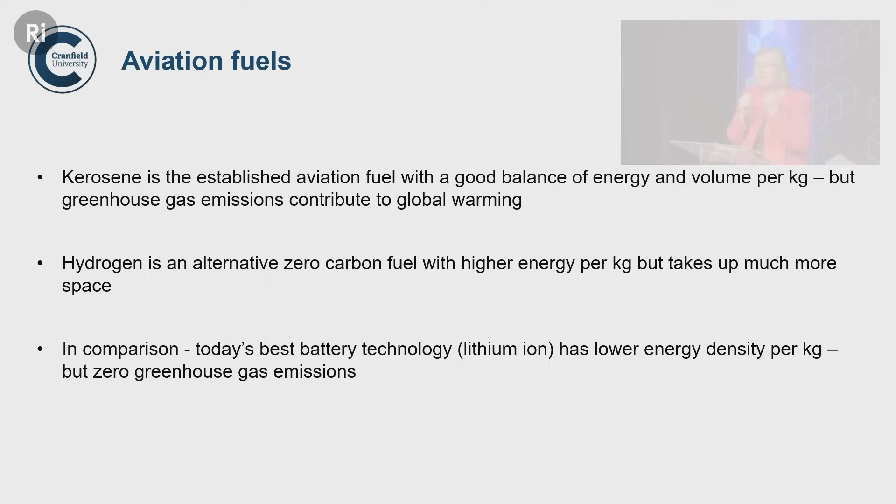So, as we look at the challenges around electric flight, we need to just ground ourselves for a moment. So, aviation fuels. Most flight nowadays is based on kerosene. Sometimes people call it aviation fuel, just as a general term. But kerosene is quite a good compromise between the energy density and how much space it takes up. So to get our aircraft into the air, we're going to need a certain amount of power to overcome the weight. Within our fuel, we've got to get that power density, that energy density that we actually need. But when we look at some of the competing ways of powering flight, there are some very big challenges.

So some of our speakers tonight may actually refer to hydrogen. Now, hydrogen is an alternative way of getting to zero carbon fuel, and it's got great energy density per kilogram, but it takes up a lot of space. So when people are looking at aircraft to get across the Atlantic, and I'm sure Jacqueline, who's one of our speakers, is going to talk about this, it's actually really difficult to have an airliner that can get enough gaseous hydrogen on board to get across the Atlantic.

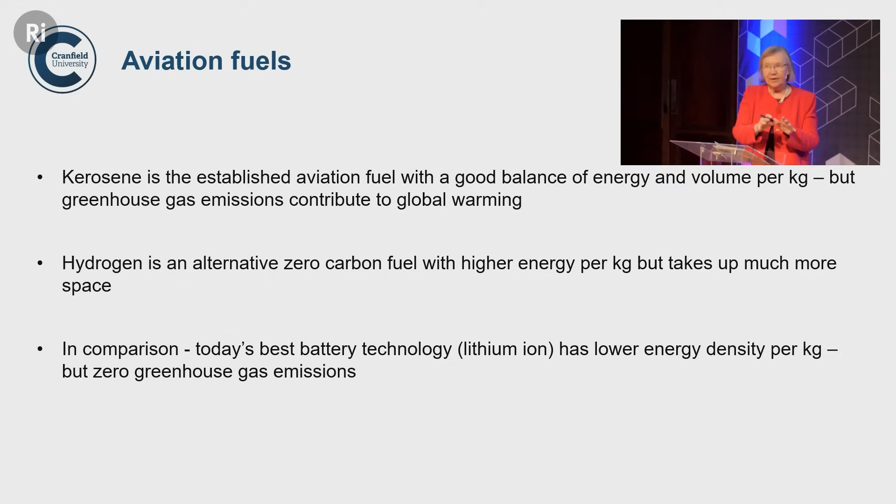Then let's look at what happens with batteries. So a lot of tonight is about batteries, getting electric flight. And we need our battery's energy density to be really high and for the battery not to weigh so much. And that's a big challenge, because you'll know for electric cars, one of the big challenges is the weight of the battery. So many of the researchers in this room tonight are real experts on trying to drive forwards how we get batteries of sufficient energy density but also at minimal weight to actually get on board. So just a few examples before we move through to the speakers.

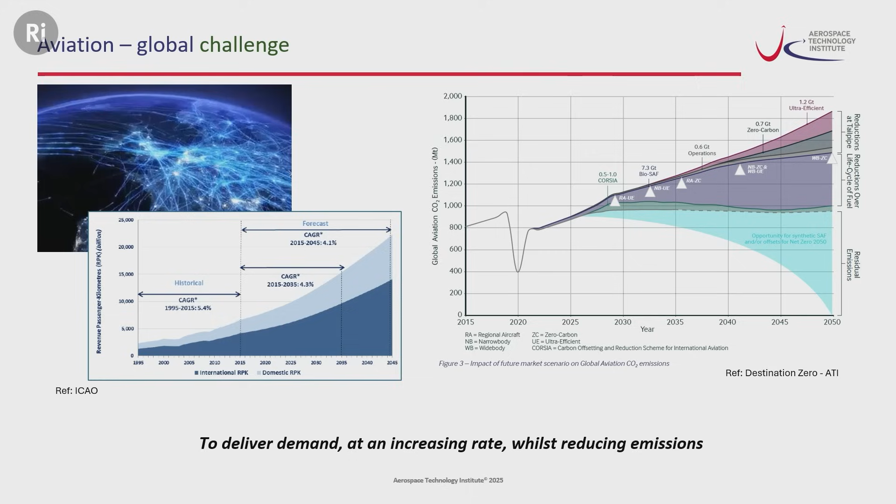But even with all of these items, there's more to do, and future technology has a really big part to play. Striving to make the next generation aircraft as efficient as possible to directly reduce the fuel that's used, and thus the emissions generated, is really key. So developing aircraft to use revolutionary fuels as well, like liquid hydrogen, as was mentioned, can also help us deliver zero carbon emissions. So there's plenty for us to go at.

Let me introduce the ATI for those of you that are aware. So we're a private, not-for-profit company, and we're working independently to advise UK government on aerospace technology development needs. We manage 3 ATI funding programmes, and to date, the ATI has directed 3.6 billion of funding from UK government, matched by industry, with a future commitment of 195 million per year out to 2030.

The ATI team provide expert analysis, models and tools to inform how technologies may integrate together and the sustainability benefit that they will then deliver. And the tools are available through the ATI website if you want to take a look at those. And they assist stakeholders in their technology benefit assessments. Our own independent modelling includes economic, market, sustainability, and aircraft-level technology modelling.

And we reflect the ATI's project portfolio onto our concept future aircraft models that can then be used to trade technology routes and give a basis for sector discussion and thought leadership. We also convene the sector through technology advisory groups, communities of practice, showcases and events, including our annual conference.

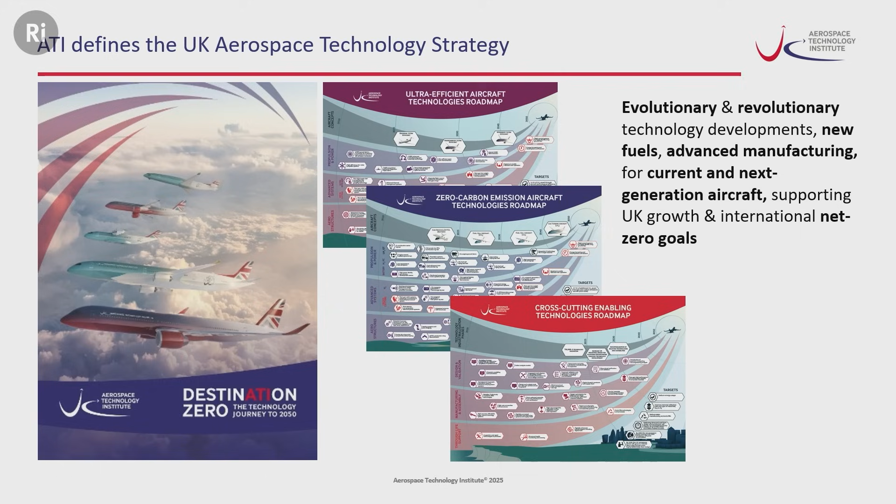So the applications for funding are made on a rolling basis, and we have 3 full-stage application gates per year. And the technology is assessed against the ATI's technology strategy that you can see on the screen here. And this guides the UK sector to the areas that are necessary to grow the UK's market share and move the dial in sustainable flight. So the technology strategy, Destination Zero, contains 3 roadmaps. It has an ultra-efficient technologies roadmap, a zero-carbon roadmap, and also a cross-cutting technology roadmap. And all these 3 areas play a part in growth and net zero.

So we need the most efficient vehicles in terms of aerodynamic performance, in terms of propulsive performance, and lightweight airframes and systems to minimise the fuel that's needed, whatever fuel that might be. And we need a revolution in technology to achieve true zero carbon flight. And we must deliver all of this in an operationally and cost competitive way. So the ambitious production rates of the future require highly automated, digitally enabled, high quality industrial processes, and products will use these advanced novel materials and processing techniques in order to achieve the efficiencies required. So the roadmaps capture all of this ambition.

So we're here tonight to focus on the use of batteries in aircraft and what more we need to do to bring battery flight to the skies. And today, batteries are used in two main ways. Firstly, to power some systems on large commercial aircraft, excluding propulsion itself. And then secondly, to provide propulsive power for very small aircraft, of which there are very few certified platforms. And Helen mentioned one of them, the Pipistrel Velis Electro. So as was said, the first certified electric-powered aircraft, fully approved and mainly used for pilot training.

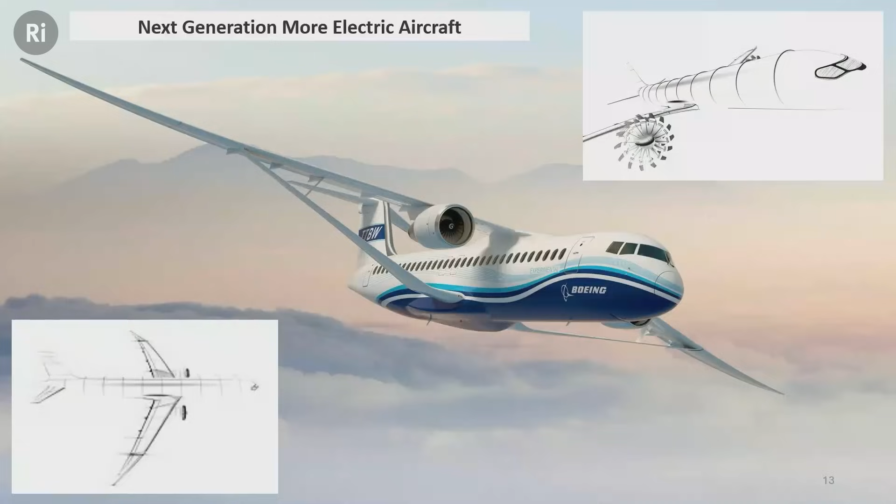So what will happen really for next generation large aircraft? The next generation aircraft are aiming for at least 30% fuel efficiency improvements, most of which will come from the airframe and from the engines. So further improving the aerodynamics with longer, leaner, lighter weight wings, like you see in some of the pictures here, and also the inclusion of higher bypass ratio engines, such as Rolls-Royce's development engine UltraFan, which is targeting a 10% improvement on previous generation engines, or CFM's concept engine RISE, with the open fan architecture, which is shown in the Airbus schematics on the slide.

However, these future aircraft will also push for advances in electrification on board and require greater battery power for these increased functions. So primary battery use, in addition to APU or ground ops, is likely to include electric taxi functions. And this would enable the aircraft to taxi from the stand at the airport out to the runway without the engines running, as well as when the aircraft lands to be able to taxi back into the airport spaces. So this would be beneficial for both sustainability and local air quality reasons. And potential hybrid propulsion applications may also require batteries, but I'll cover more of that in a moment.

So other backup functions during flight, in addition to primary flight controls, would include avionics, lighting and fuel pumps that are already on the aircraft, and could include secondary flight controls, such as the braking system, the environmental control system, cabin systems, and perhaps other landing gear functions. So even a small number of these additional functions will lead to a substantial increase in demand for aerospace-grade batteries, which is orders of magnitude higher than today.

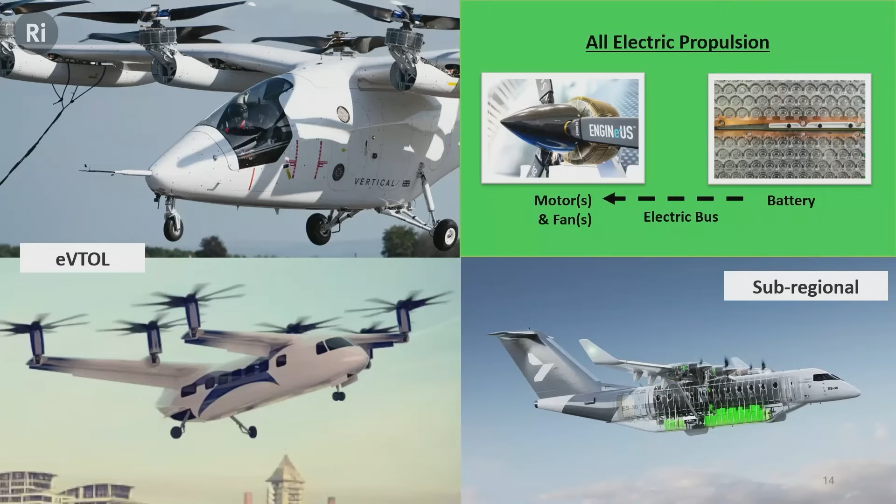If we turn now to pure battery electric propulsion, as shown in the diagram here, the batteries are powering electric motors that are then driving one or more fans to propel the aircraft. So it's probably as simple as you can get. In the UK, there are exciting developments in electric powertrains, and Safran has recently certified their ENGINeUS motor technology in a world-first EASA CS23 certification. This technology was developed with support from the ATI APEC project, and we can look forward to production at their UK Pitstone site with applications for motors initially on small aircraft, similar to the Pipistrel, as well as for eVTOLs. But pure electric propulsion developments today are mostly aimed at the eVTOL market.

And whilst the flow of energy from the battery to the motor and to the fan might be pretty straightforward in principle on a piece of paper, there are many challenges to overcome. But here in the UK, we have a number of organisations working in this area, with Vertical Aerospace being the most advanced. And you'll hear more from them next, and how they're developing their battery packs for their full-size VX4 prototype, as you see at the top left in the picture. That's during initial piloted tethered testing, but I know they've made much more inroads now in their flight testing, so I'm hoping we'll hear more about that in a moment. But one of the main challenges with pure battery-powered vehicles is managing the weight of the batteries as a percentage of the overall vehicle weight, and being able to then deliver sufficient useful range.

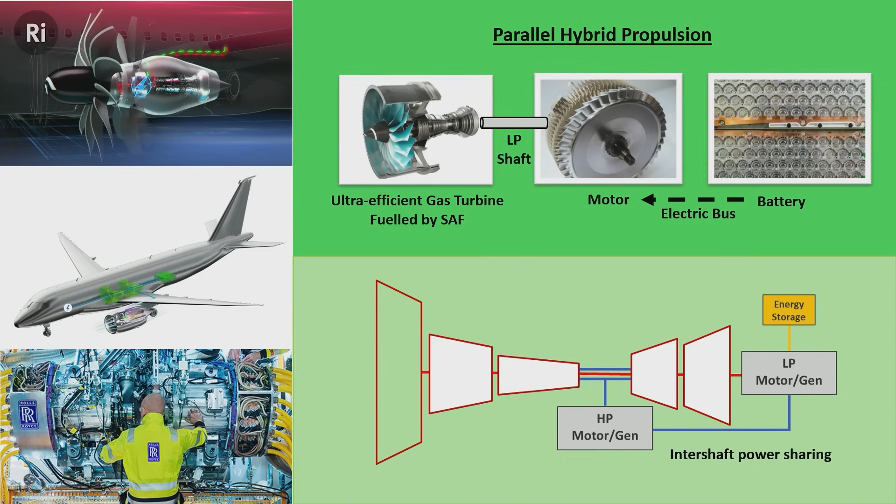So the system would need to address other aerospace-specific requirements like higher altitude operations, but there is great progress being made and many studies actively, globally, that are looking at these options. As you can see on the left-hand side here, the RISE engine, the SWITCH project that Clean Aviation are funding, projects with NASA's electrified powertrain flight demonstration, and closer to home, Rolls-Royce have run ground-based testing as well.

So I hope this has shown that there are multiple strands to the rise of electric flight. There's a rich and dynamic research environment all working to overcome the many challenges to deliver an electric revolution.

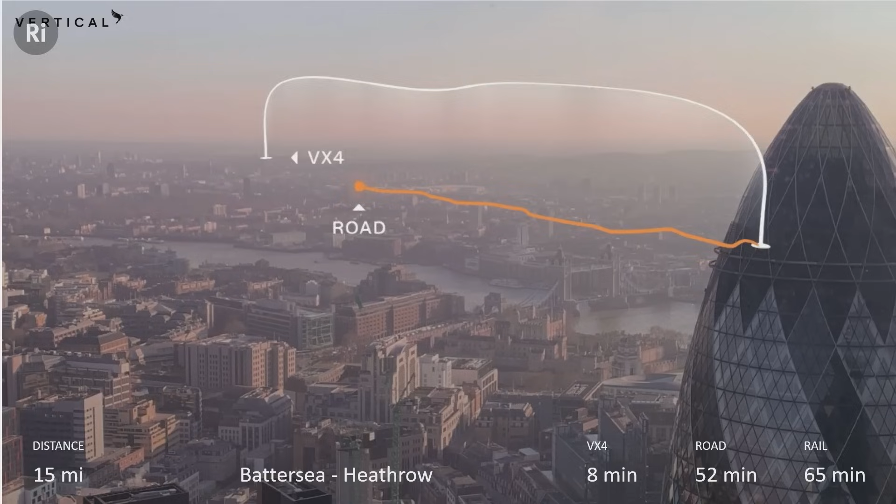So let's come away from Sao Paulo for a brief moment and go to somewhere a little bit closer. Imagine you're going from Battersea to Heathrow. In fact, I was doing some driving in London today, which is novel for me, and it did take a very long time to go anywhere. But best case, without a lot of traffic, we find ourselves with 52 minutes if we're going to take the car, 65 minutes if we want to take the rail, and 8 minutes if we wanted to take a helicopter. In our case, a very specific type of helicopter. So this is a multi-rotor.

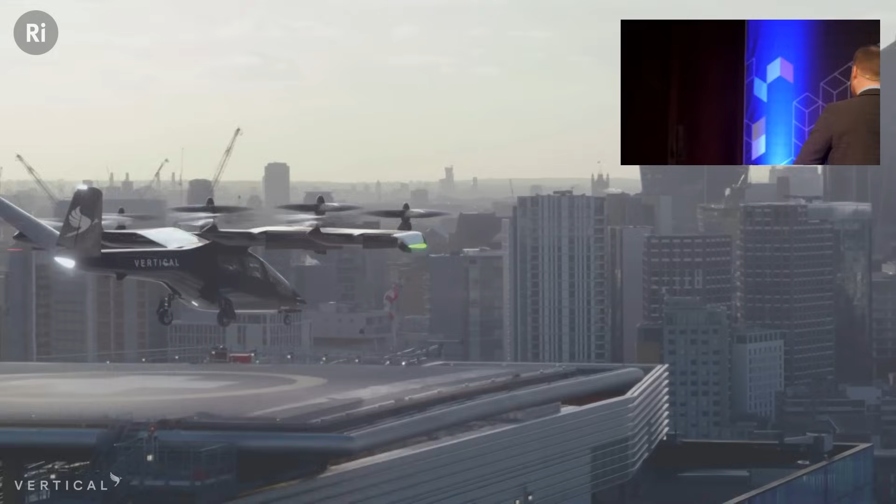We've got some more animations for you. In this particular case, the helicopter has a distributed electrical system, which is the main advantage of an electrical system, multiple motors. You would be able to come onto that, go through security in a sort of downtown, check out of your hotel, go to the roof, go through security. I'm about to catch a flight tomorrow. I give myself about 2 or 3 hours buffer, depending on traffic, security, and everything else to get through. The concept being the amount of time that we save.

When we do that, we fly in airside, we get off, we go onto our aircraft that's going long haul. So these types of aircraft are a real sweet spot for battery technology, predominantly because the larger they become, the more power you end up with, and the batteries just aren't light enough. Whereas they can really work in a condition like this. I'm going to have to check my notes, make sure I've covered off all the points. They really do work. Now, you've seen a lot of renders, so I wanted to show you something a little bit more real, so I'm going to be quiet. Test B2.

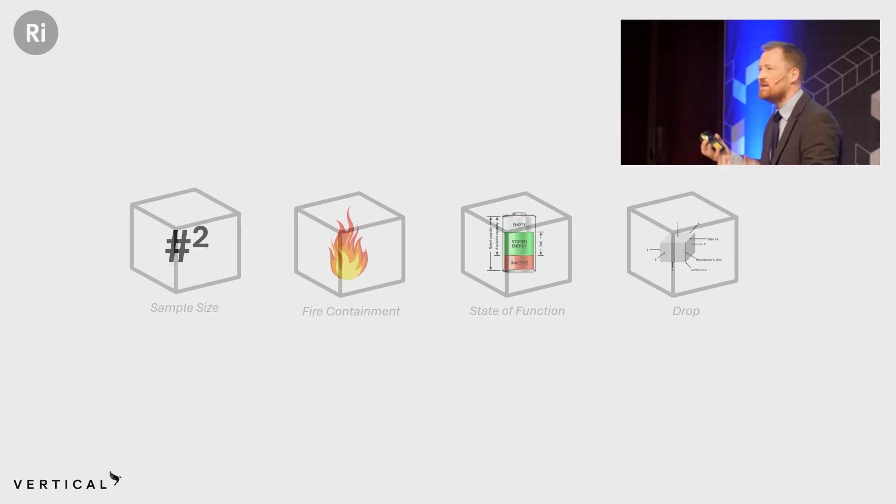The first one we'll save till the end. It is the most boring of all of them. It's just sample size, okay? It becomes significant. Secondly is fire containment. Everyone thinks about fires and batteries, and we all see the videos of various cars on the roads and those problems. The next one is something called state of function. You might refer to it as state of charge, but it's got some temperature considerations in there, so we call it a little different. And finally we have quite an aggressive drop test. It's novel for battery systems generally, and so we have to try and comply with that.

The other thing just to note is, of course, there's other things. So you could talk about mass. I sat in a meeting once. In a previous battery design, before Chris got involved and made them better, we had lots of these tiny little titanium bolts. And I was sat in one of our meeting rooms with a company talking about the cost and precision of drilling out the center of the bolt because we didn't need that bit of the mass. I can't tell you how expensive it is to drill out the center of a titanium bolt.

So it's a very niche area of battery work. You would not have got them in the room at Jaguar, let me tell you, because it was much more cost-focused. But in our particular application, it was slightly different. So we'll cover each of these briefly.

First is this drop test. So that is an animation on the right. It's going to show you what a good drop test looks like when it's a pass. Good, okay. It's still a pass from last time. But essentially what you have to do is take the battery. It's a rather morbid story of how you end up with a drop test, by the way.

It comes from a rotorcraft fuel tank test, and it's done from a series of military real-life accidents. And they calculate the height at which they're confident you cannot survive, which turns out to be 15.2 meters. The idea being that if you dropped from less than that height, you would hate to survive the crash and then be set on fire by the fuel tank or something else, all right?

And it's exactly the same as a battery, okay? It is as horrible a story as that, but in fact, that's all you do in aerospace, is talk about different ways to stop people from being injured, is basically the essence. But you drop the battery, you can have something called an automatic service disconnect, so you can disconnect as you come down. Secondly, you've got to provide a manual service disconnect for those on the ground.

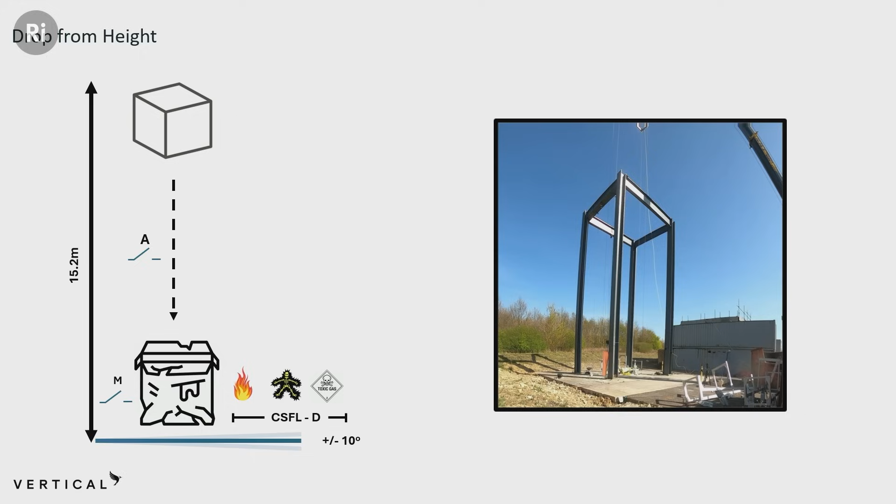And then there's three main things you've got to be able to comply with. One is fire. So you cannot have any fire. You can see on that particular video we didn't have any fire. Secondly, you cannot obviously electrocute anyone. And then thirdly, you have to ensure there's no release of toxic gases or materials, okay? And this battery makes it look very good, but it took lots of years to reach the point where we were comfortable at the mass point that we had and the performance that we had to be able to pass that drop test.

So inside the cell you've got copper that sits around the electrode. For the most part, the active material gets flamed away and you end up with a copper. And that copper can come out and short circuit on a neighboring cell. That can cause the next cell to catch on fire as well. And then the final one, in a cylindrical cell, you've got this pressure gap at the top. If that pressure gap operates, you're trying to force it out the top. Sometimes, if the pressure is too rapid, it can come out the side, so you end up with a slightly different condition.

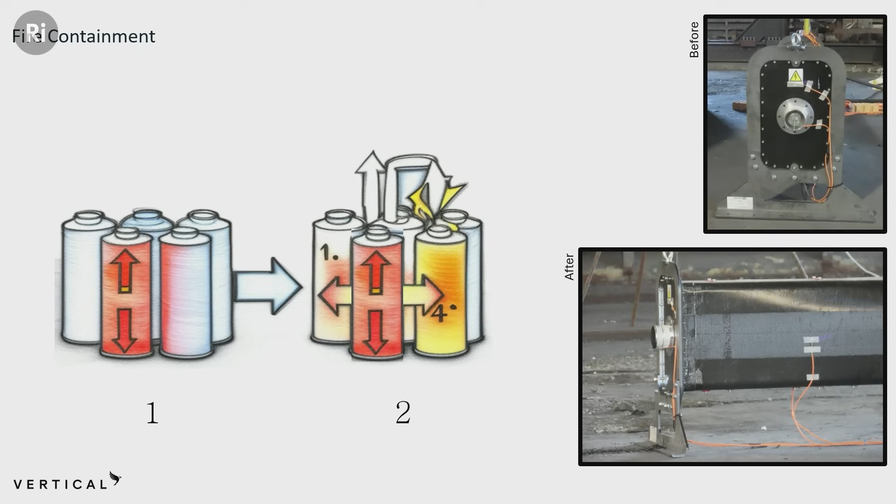And so in the event that a fire happened when you were flying, the requirement is something called continued safe flight and landing. You wouldn't even notice. The pilot would know there'd be something coming out the back, so I guess you could sort of crane round if you were paying a lot of attention. So you're going to continue safe flight and landing, you're going to continue to your destination or wherever else it is that you're going, and the requirement is just send all the thing out one designated vent.

It cannot interact with the pilot, it cannot affect the passengers. You'd get your stuff, you'd walk away from the aircraft, then you'd go, oh, is that meant to be sort of smouldering on the side there? And that's exactly how it would pass. The other advantage you've got is, in aviation, certainly our vehicle, you have multiple of these batteries. And so when one fails, all of your failure conditions are dealt with to deal with the fact that one of them has essentially caught on fire, this worst case fire condition.

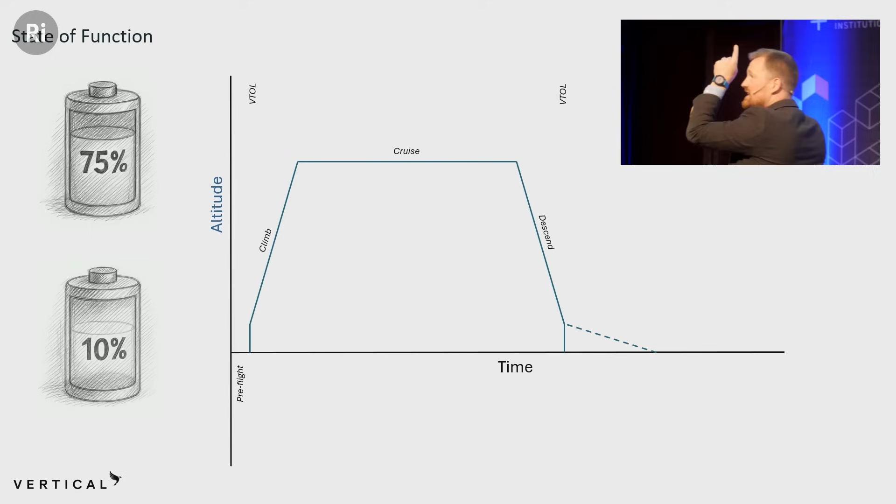Okay, second from last is this state of function, which again includes, it's basically a state of charge. It's the little battery you've got in the top right of your iPhone, or other phones are available. But you're essentially looking for, and what you're trying to predict is the exact power and the time that power can be provided for the duration of the flight.

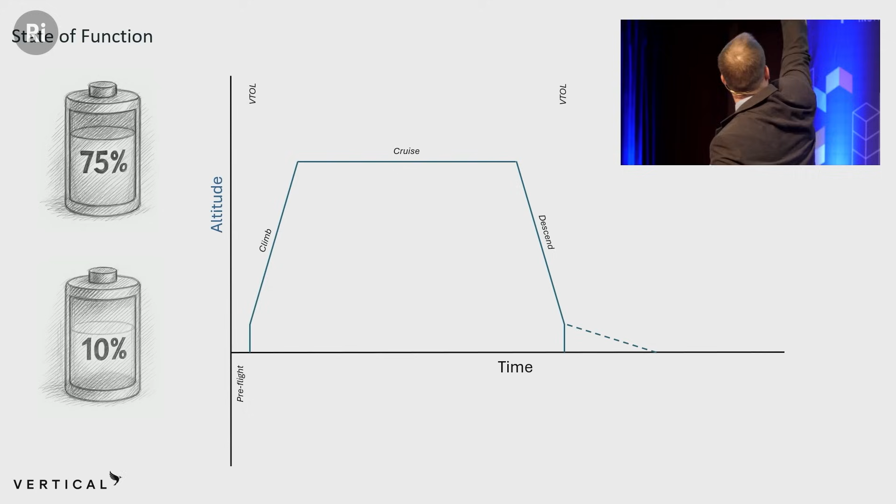So in this case, this is an eVTOL. You take off in your vertical configuration, you climb for a period of time, you cruise, you descend, and then you land again vertically. The dotted line is what you would call a go-around. So you're coming down to the landing pad, someone's pet cat's on the landing pad, and you've got to go around and find somewhere else. And that's what that condition's dealing with, which is this hover condition.

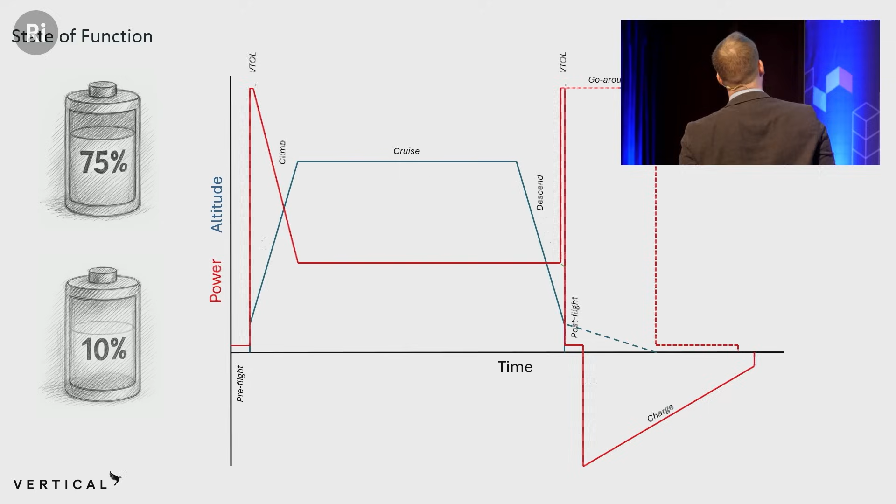We overlay onto that the power demand. So we have huge powers, and anyone that knows anything about batteries knows that this power at the end is a massive headache because you're coming low in your state of function, your state of charge capability, but now you still want maximum power coming into land. So that's the condition you have to deal with. It means you set aside a lot of your battery permanently just sat there waiting for this failure condition, so you never operate that low.

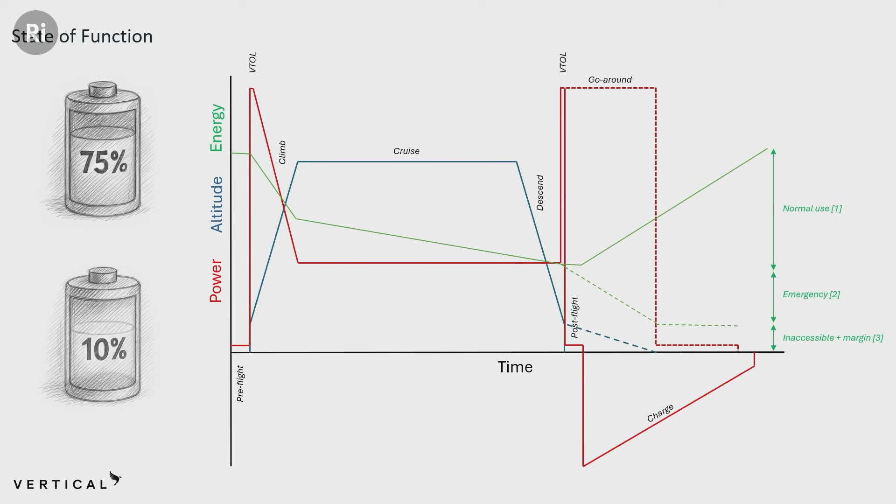Finally, we end up with some profile in terms of the energy where that sits. So we see cruise does consume the vast majority, depending on the length of the cruise. So your power demand, although very high during those vertical takeoff portions and landing, is actually relatively reasonable in terms of total energy that it consumes.

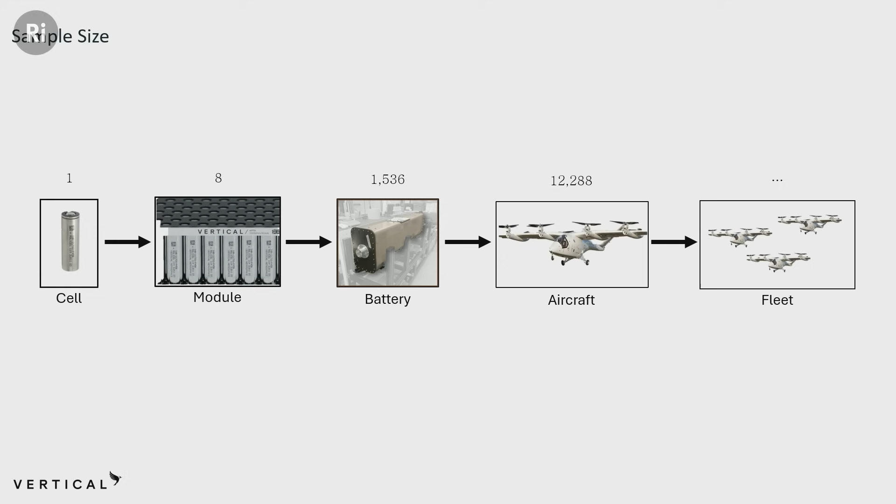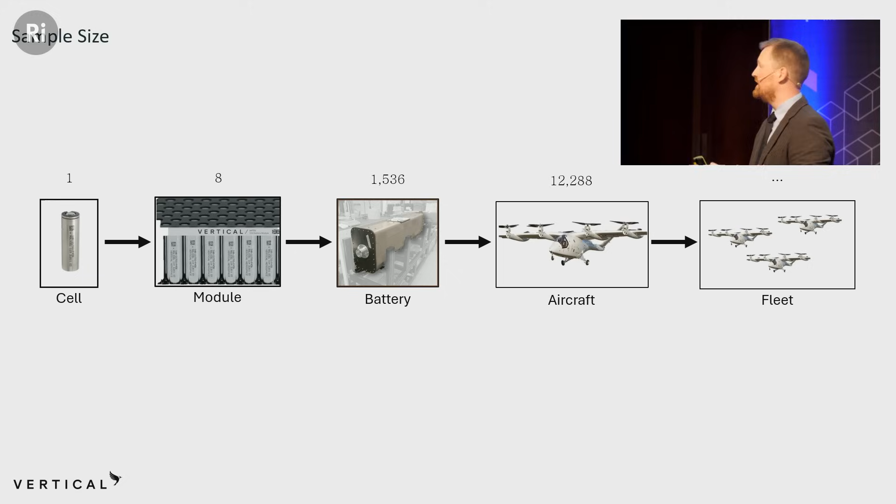1 minute, excellent. So the final thing is sample size. When you take a cell, progress onto a module, you start coupling these things together. Now anyone that's done some sort of physics at school will remember that with multiple resistances in a line, the minute those resistances vary, you can end up, in our case, producing energy in different quantities and at different powers, right? And the difficulty for that is the minute that you start to scale up, here we go.

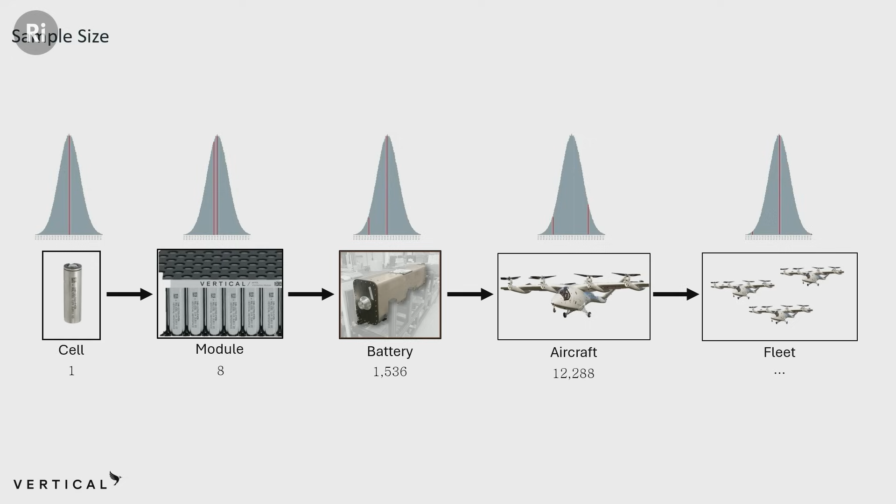You've got a whole fleet, you've got aircraft, and so every time that Chris and his team at Vertical try and deal with this consideration of what is the remaining time of flight, what's the power required, what does a thermal propagation look like, what you actually have to do is consider what it looks like if everything gets skewed at the top end, right? What happens if I end up with a battery where everything's very low resistance, very high energy? What's the condition that captures that, and is it possible?

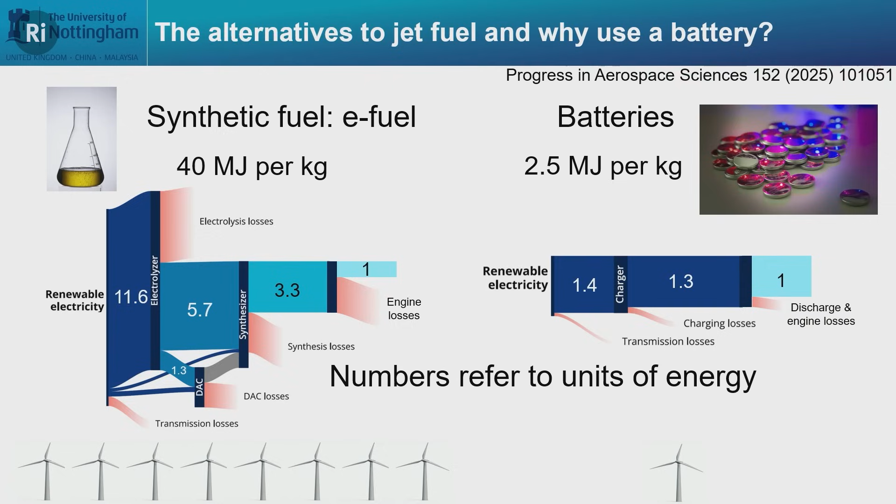So while a battery has 10 times less energy density, it has roughly, at least compared to this e-fuel I'm comparing to, about 10 times more energy efficiency if we consider wind farm to kinetic energy powering your plane. Now, we can argue with the numbers, we can take different fuels, but the result will always be broadly similar, right, that the battery will be more efficient. And you can see the number of windmills I've got at the bottom kind of expresses that in a schematical way, right? So that's why we might want to use batteries. And that's not to say we wouldn't use the chemical fuel, it's just a question of when we would flip from one to the other. So let's consider when we might do that then.

And just to be clear, I'm focusing here on energy per weight. There's been a bit of discussion about the automotive industry today, and to be clear, the automotive industry doesn't really care about energy per weight. It cares about energy per volume, and it cares about price. And that's why the batteries have pursued those metrics, not energy per weight, and we need to turn that around a little bit. So the real question for us then is, if we want to hit these kind of metrics, and we want to, let's say, power a narrow-bodied plane, we need to be finding a battery that's going to give us around 700 watt-hours per kilogram.

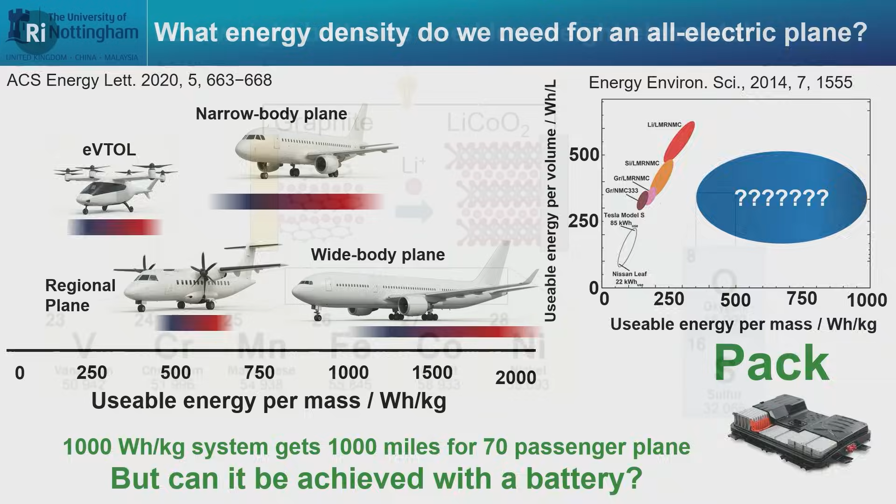Can we ever do that? That's the question I'm going to kind of present here. Now, I'm a chemist. There's going to be no, I apologize, no fancy pictures of planes here. I'm just plain, so I'm just going to have pictures of chemicals, right?

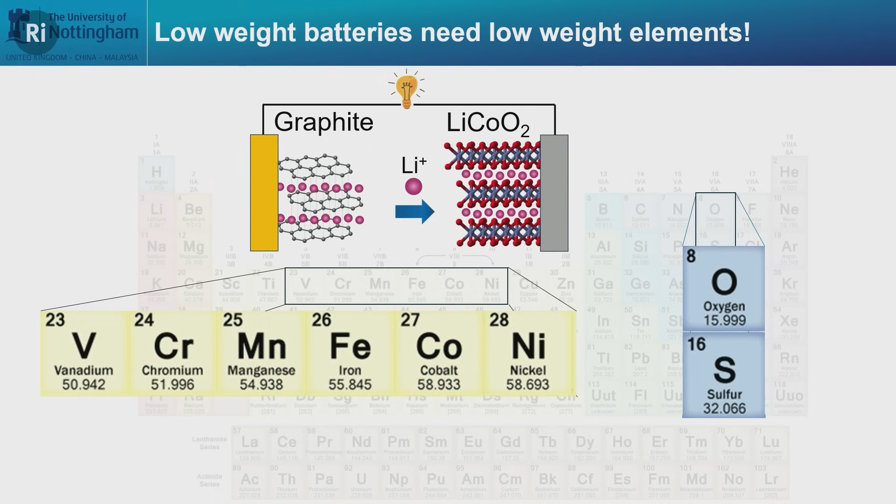And I'm going to start with this one where we consider what's in a lithium-ion battery. And at least at the positive electrode, what we've got is a lithium cobalt oxide, or some kind of metal oxide. And metals are intrinsically heavy, right? Just based on where they are in the periodic table, they have a large mass. And what we need to do, if we want to make a light battery, is to find something to store the charge on. Rather than storing the electrons and the charge on the metal, we need to find something light.

And the obvious thing is to go to the top right-hand side of the periodic table. We might pick fluorine, but that will be a problem because fluorine gas will just disappear from the battery. But then we could come back to reality a bit, and we could maybe think of oxygen. Can we store the charge on oxygen? Can we give the electrons to oxygen and bind a lithium ion to that? Or maybe sulfur would be an option, right? And then we're going to drop quite a lot of our mass compared to if we were using cobalt.

So what would that battery look like? And that's what I'm going to present today, the lithium air battery. This is an air-breathing battery where instead of storing the charge on cobalt or some heavy metal or metal oxide, we're going to store it directly on the oxygen. So we're going to use a lithium negative electrode. We've got to use lithium for the voltage. There's no high-energy battery that's not going to use lithium. That's just a fact. Oh, if my thing will work.

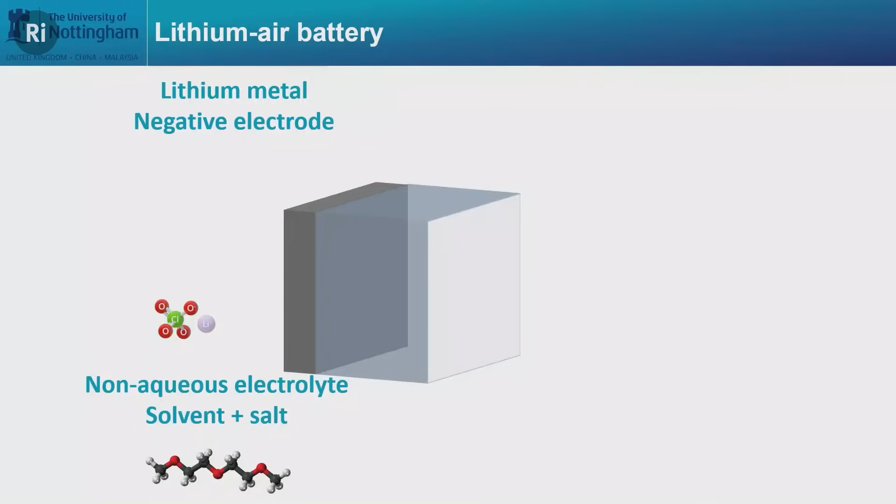We'll have some kind of electrolyte, which will be organic, and we'll have lithium ions in it. We need electrolyte to move the charge around in the battery. And then we'll have some kind of porous positive electrode structure where we're going to do an oxygen reduction reaction. This is somewhat similar to a fuel cell, if anyone knows about a fuel cell, although the chemistries are widely different, but you can take that analogy. And we're going to reduce oxygen and give it 2 electrons and 2 lithium ions to form lithium peroxide. I'll come back to why we want to form lithium peroxide later and not an oxide.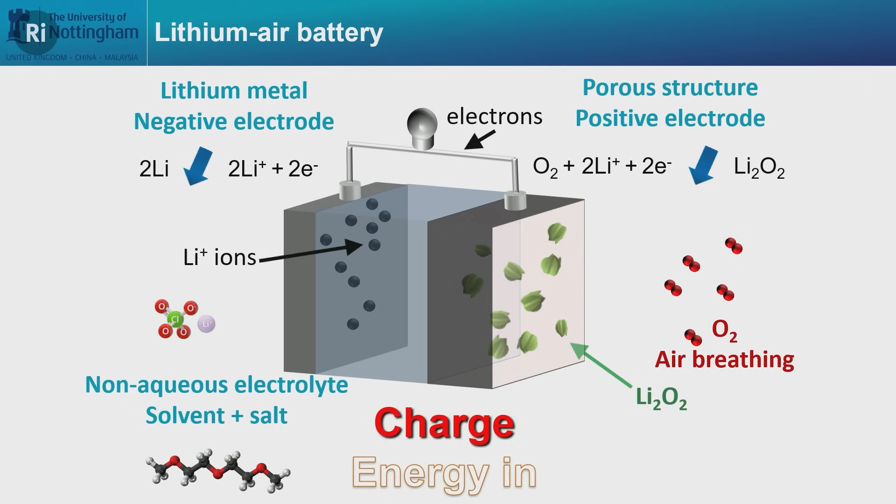But the peroxide is a solid, and it's going to fill up the structure within that electrode. We're going to fill that whole volume, and we need to if we want a high-energy density battery. And then what we're going to do is reverse that on charge. We're going to oxidize our peroxide, kick our oxygens back out. Now, our lithium ions are going to go back to the anode, to the negative electrode, I should say, and everything is good with the world.

But the battery doesn't look quite like that. It actually looks like this, where it's actually a full system. So the big brown cylinder you can see, that's the pack. The pack is the assembly of all the cells. I previously showed you one cell; this has many cells in it. But it's an air-breathing battery. We need to take oxygen from the atmosphere and pump it into the battery. So it has a whole series of engineering solutions on top of it that allow the battery to have that oxygen flow in and out of the battery.

And give or take, modelers predict that this battery would give around 500 watt-hours per kilogram of energy density. So just enough to tee into that kind of area where we might get some meaningful commercial electric flight for the general public, okay? But I'd argue not good enough. There are also huge challenges. I'm not going to go through them all today. I don't have time. I'm going to cover 2 very quickly and then come to some engineering points to finish. But there's big problems with using reactive lithium metal, but that's for all future batteries, and there's a lot of degradation. But I'm going to focus on these 2 first.

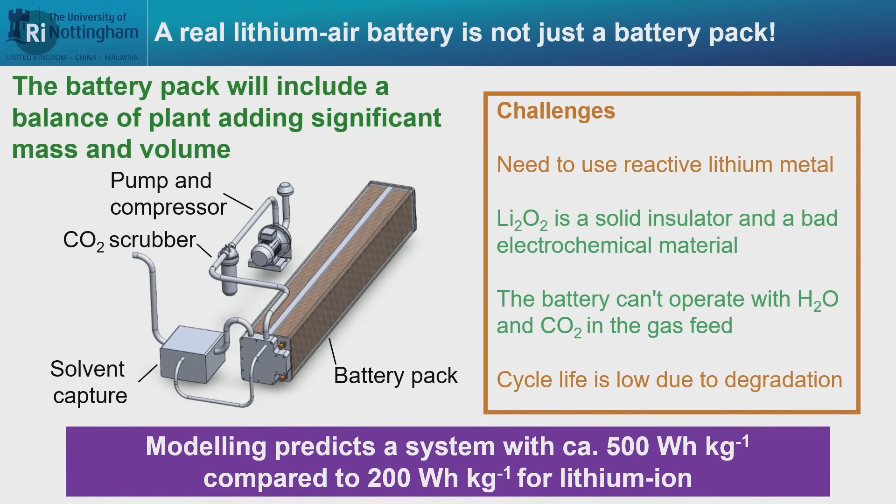One, lithium peroxide formation, and lithium peroxide is an insulator. I'm an electrochemist. Me and insulators don't get on; I want to give it electrons and it doesn't want them, right? And the other one is that we need to get rid of water and CO2 in the air. So let's take a look at those 2 problems.

So the first one is the water. It's an air-breathing battery. So we're going to take oxygen from the air, it's going to go in the battery, but that's going to bring water with it. And the problem is, water will catalyze this process here. Sorry, I know we can't see the cursor on the camera. It'll catalyze this process here, I should say. So we want to form peroxide where the oxygen atoms are stuck together.

And the reason for that is, as I said, battery chemistry has to be simple. If it's not simple, you can't make it go back the way it came. It wants to go backwards and forwards for the reaction hundreds, if not thousands of times. But if you put water in it, those 2 oxygens that are stuck together in the peroxide, they break apart to form hydroxide. And now you're into the territory where what you need is catalysts, extra energy, and a whole host of problems, right? So basically, you haven't got a battery anymore. You've not got a secondary battery. It's just a primary battery.

So what we found, though, is if you take out the steel and the kind of random catalysts from the battery, we can avoid this reaction. And actually, our battery can breathe air with water perfectly well. And now, if you come back to the engineering point, we don't need to take water out of the battery. We can allow that in and out of the battery fine, neglecting the lithium.

I'll take comments on that, I'm sure.

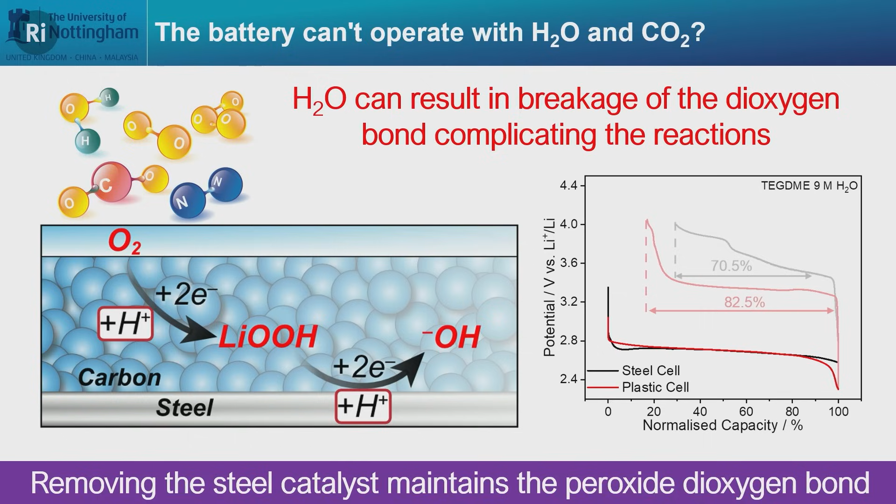And that gives us a significant overhead or a significant increase in the energy density. And you can see the performance on the right there, but not too important. So that's one point. And I guess the point here is that with careful materials and chemical engineering, we can overcome some of the limitations of this system.

So what we've done here to try and improve this is to develop molecular catalysts, which we put into the battery. One of the reasons for this is that peroxide, as I said, is an insulator, and as you form it, what it can do is effectively passivate and stop the electron transfer events and make the battery low energy, effectively. We can't transfer the electrons because we're using this insulating material. So what we've done is introduce small molecular catalysts which effectively short-circuit this reaction by transferring the electrons from the electrodes in the battery to the oxygen, so we don't have to have this insulating barrier that we had before.

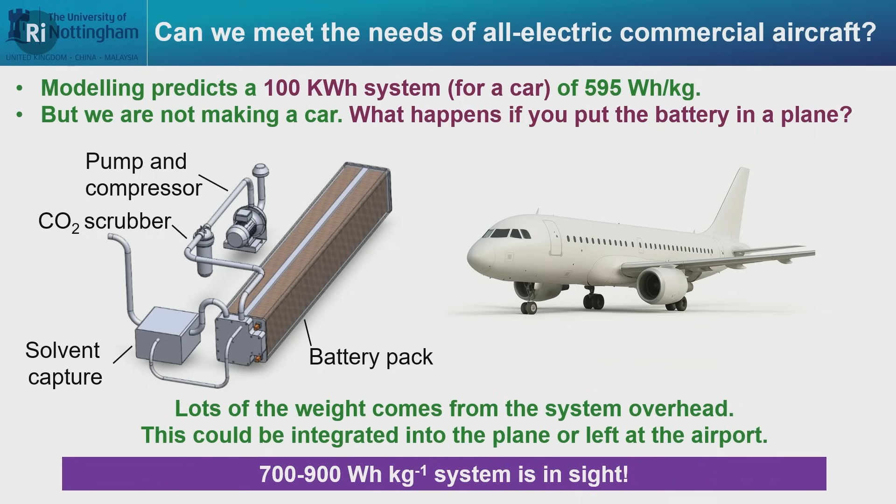And if you take all those engineering considerations into account, we think we should be able to get to around 700 to 900 watt-hours per kilogram, which is that number that we need if we really want to power a narrow-bodied flight. So I think I've maybe simplified this. There's definitely huge challenges, both chemical and engineering. But I think if you consider the roadmap to the technology, there is a solution there that could meet our needs.